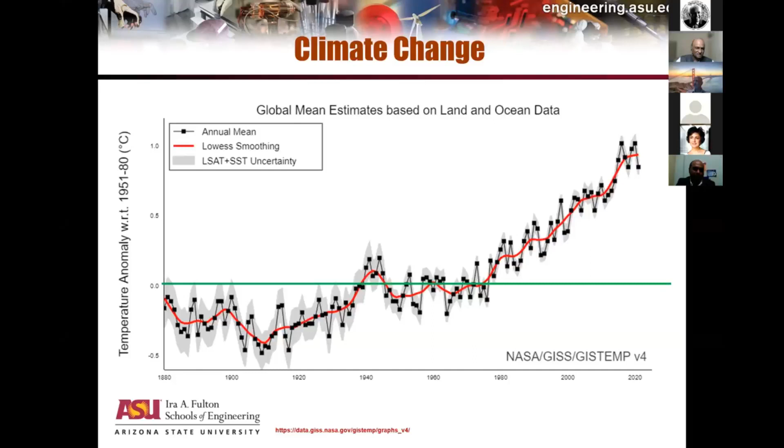So with climate change, the building industry and every single person on earth has this issue to deal with, in terms of leading a sustainable life in every single aspect of that life, not only at the workplace but also the way we live. I'm not going to give you the formal definition that came out of the Brundtland Commission, but I'll give you my own definition of what sustainability is.

To me, sustainability is like trying to define a very complicated topic like pornography - it is very difficult to define, but I don't have to tell anyone when things are sustainable. It's just that people may elect to ignore it. But the signs of what is sustainable living and what is not are very easy to discern. I hope the audience today will reflect on what they do every single day, from the time they get up to the time they go to sleep, and see whether every single minute of the day is connected to sustainable living, and whether they are leading a sustainable life or not.

So the last part of my presentation today is to talk about a few approaches. These are my viewpoints - they are not the viewpoints of Arizona State University or anyone else.

These are the things that I have learned by working in this area over the years. I'll discuss five components in terms of the approaches I will cover with you today.

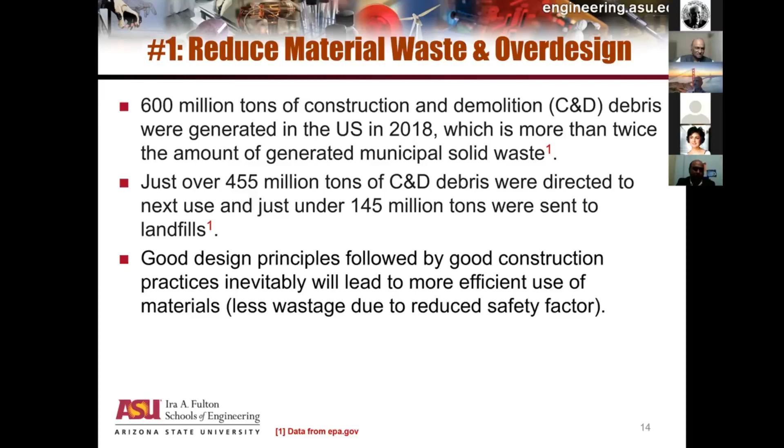My introduction to really getting my hands dirty started in the 1990s with a local problem that a local company brought to my attention. There was a company here called Del Webb Construction, primarily in residential and a little office building industry, and they had branched out from Arizona to a lot of other cities, including Chicago.

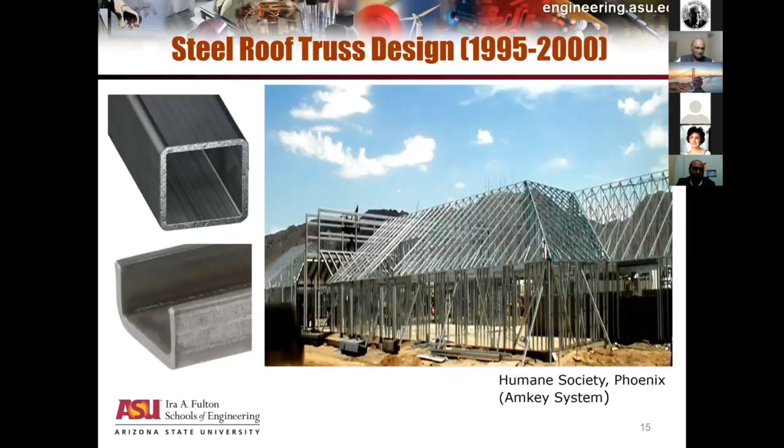Hari told me, please try to make sure you don't come up with too technical issues. But I couldn't resist putting this slide up just to give you a perspective that science and engineering cannot be ignored. So what I learned back in Iowa kicked in.

I said, let's try to formulate this problem as an optimization problem. An optimization problem is what each one of us does every single day subconsciously. If you could make that a conscious way of looking at engineering problems or resource allocation problems, you'd find very interesting solutions.

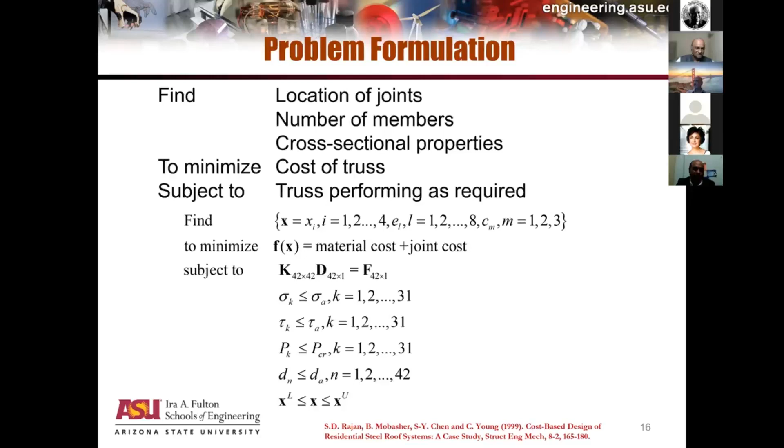I wrote a computer program going back to MS-DOS and then to Windows back in the mid-1990s. There was no machine learning involved, no artificial intelligence involved — it was heuristic-based mathematics driving the design.

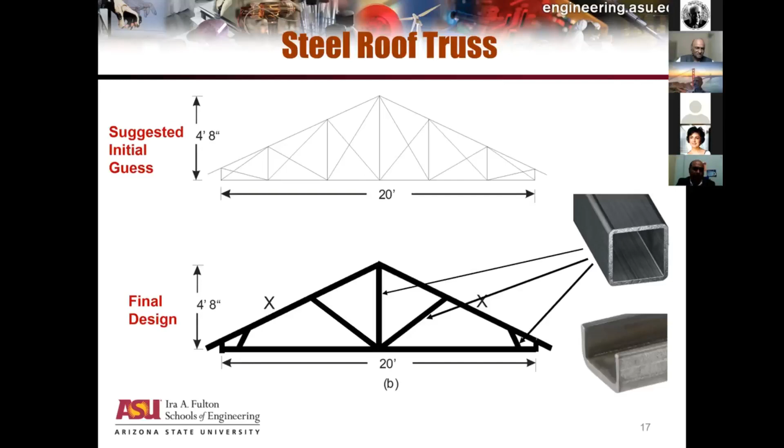When I showed this design to the local company, they said this doesn't look like something that would work, because this is something we have never seen, never used, never built. I said, if you're skeptical, go ahead and build one, and we'll test this in the laboratory for you. So they built one and brought it to the lab. They built 3 of these trusses.

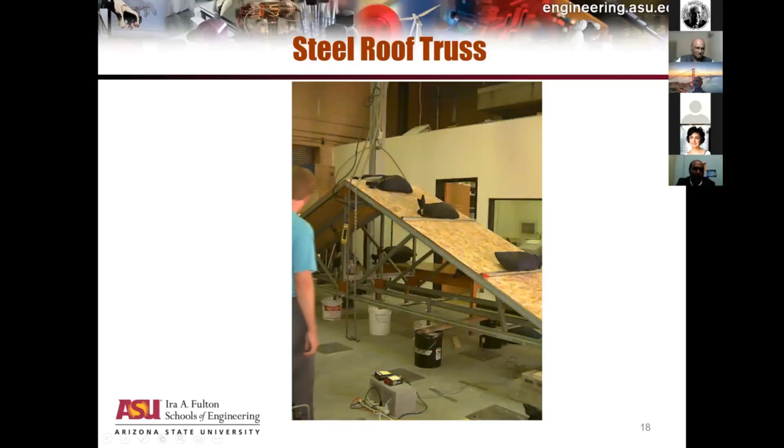In the US, most roof trusses are typically 2 feet apart. So you can see a 4-foot span, and the top chord plywood is put on. On the top chord, we loaded this with sandbags. We instrumented this based upon what we had available in the 1990s. We loaded it completely, and then we ran out of sandbags.

Just to recap: span of 20 feet, 3 trusses, spacing 2 feet on centers. Top chord design load was 30 pounds per square foot, bottom chord was 10 pounds per square foot, and the design load was 1,840. We took it to 2,000 pounds when we ran out of sandbags, and the thing didn't budge an inch. The deflections were extremely small, and there was absolutely no sign of distress anywhere in the structure.

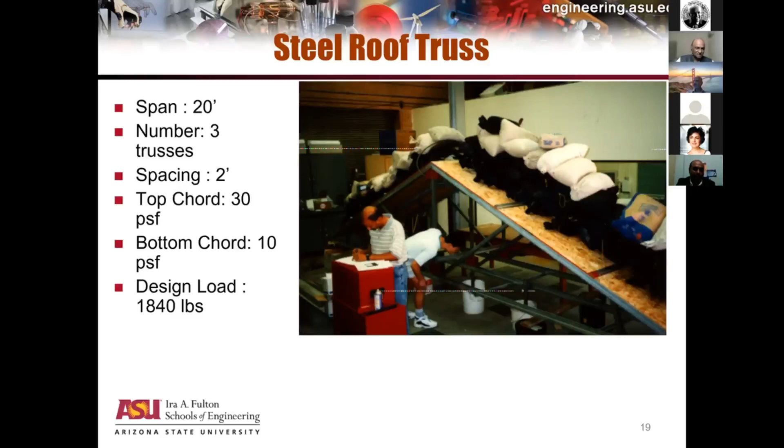So we gave them the design program and the equations to use for the design. I'm happy to say they took it, and a large number of structural systems today have been designed using the concept of cold form steel arising from automotive waste. I know automotive waste in India will be a big deal when government norms kick in and old vehicles on the streets need to be taken out of circulation.

My second small solution to this enormous problem is to improve constructability and quality of construction. For the architects and civil engineers listening in, we need to work as a team to design reconfigurable buildings. For example, in the US, malls are dying. So what do you do with malls that are relatively young? We can't just mothball them, we have to reuse them. If that thought process of reconfigurable buildings were built into the initial design, we would have much less of a problem.

A second big problem, which probably may hit us in the next few years, is work from home. When work from home really takes off — it has taken off a little bit in the US — what will happen to office buildings? Are they going to be mothballed? Is it easy to use an existing office building for something else? What will happen to homes currently being designed where you need a certain part of the house to be used as office space? That's an issue that needs to be addressed.

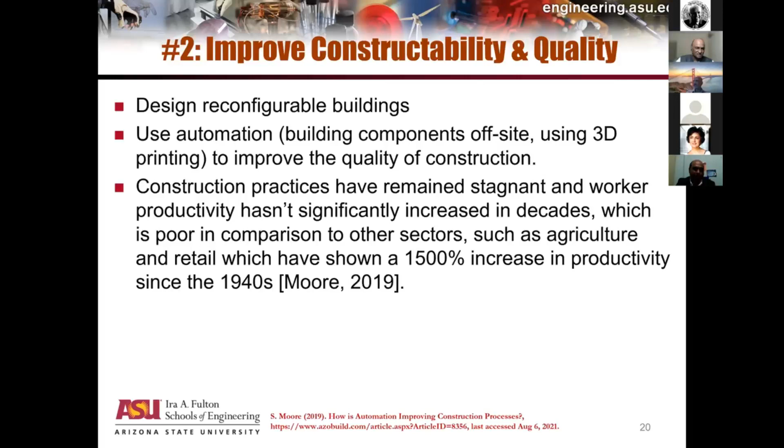At Arizona State University, we've done a little research work on how to improve things, and I'll give two examples. The first is treating the envelope of buildings. Most of the energy loss or unwanted gain from outside comes in through the skin of the building. Commercial and residential buildings in the US typically use 40% of the energy use on this. If you improve that efficiency by merely 5 to 10%, based upon existing technology available, it'll easily translate to enormous savings in energy.

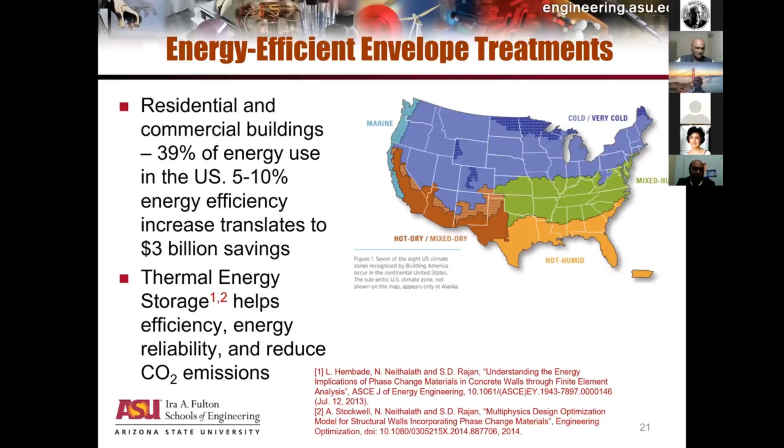So we researched an area called phase change materials, or thermal energy storage. I've given here two papers we published back in 2013 and 14. I'm very happy to report that two of our students recently appeared in Forbes Top 30. They received money from SBIR, the Small Business Initiative in the US, and started a company called Enkoat. Enkoat has used our technology in coming up with a proprietary blend of thermal regulating additives that you can add to paint, and paint the outside of existing and new buildings in order to cut down on energy usage.

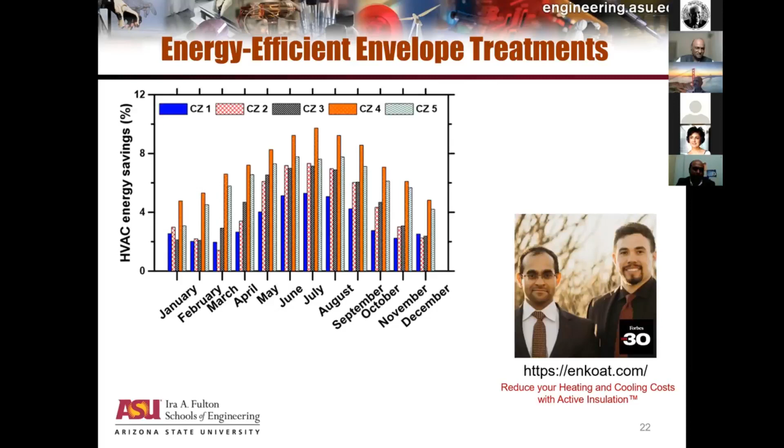With that, we said, why don't we take that idea of using thermal energy storage and apply it in the context of 3D printing? One of the advantages of 3D printing is that you can have extremely high quality control.

You can build components on site, so transportation costs can be decreased tremendously. You can come up with components that can then be used as building blocks in making whatever you want to make. We have a 3D printing lab on campus where these components were printed. You can see here, foam has been printed on top of a concrete wall. We have taken waste material like fly ash and put that into the 3D concrete mixture, and we have extruded them into a variety of shapes. This is, again, one of those ideas borrowed from other industries and used in the building industry. 3D printing technology was not developed in the building industry, but there's nothing which says we cannot take ideas that other industries have pioneered and use them to advance our own industry.

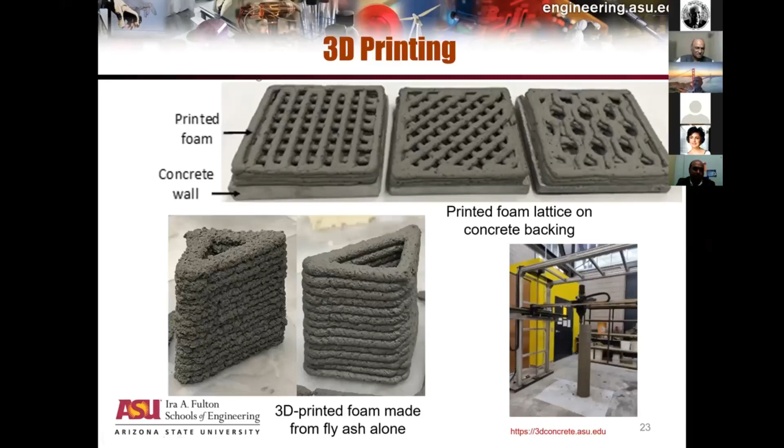These things will work if you have good modern tools where you can do computer modeling, where you can base things on science rather than gut feeling or repeated testing. So virtual testing is what we do. We design things in the computer, and as a proof of concept, we use the designed computer models, and we make actual components and test them. On the screen, you see on top the computer model of a component where attention has been paid to reducing the amount of material, a sustainability concept, while making sure you don't compromise on safety, you have very high quality control, and you extend the longevity of whatever components you're making.

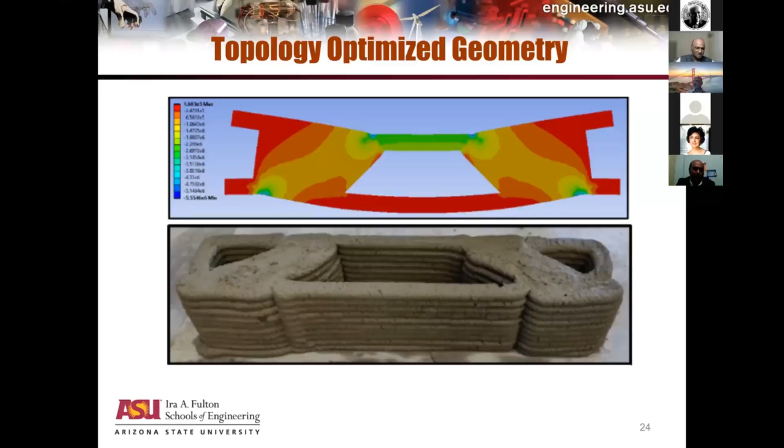This idea has now been taken to a home being built in Tempe. It's a 1,700 square foot home with 3 bedrooms and 2 bathrooms. 70% of the home is 3D printed. If you're interested in the details of this building, I've given a link below, and you can look at the company and the entities involved in using 3D printing technology to automate building homes. Hopefully, once you scale this, the cost will come down, and this eventually can provide a solution for affordable housing.

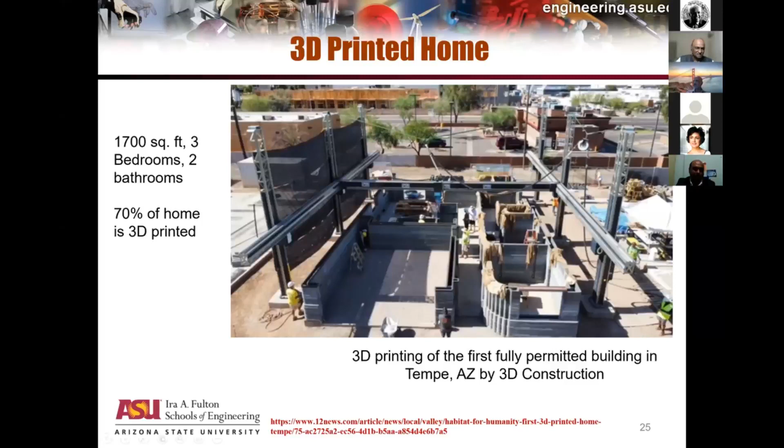The third component is the use of sustainable materials. Whatever I'm saying here is nothing new, but there are some stark realities we need to deal with. We cannot switch things off today and pass legislation banning the use of concrete and steel. That's not possible, and the consequences would be extremely dire, but we can definitely raise awareness that concrete and steel need to be made more sustainable and more energy efficient. There are 3 terms very popularly used today to classify the sustainability of materials: one is embodied energy, the second is embodied carbon, and both by themselves are not enough. There is a new term recently used called global warming potential. All 3 terms look holistically at what is possible in classifying a material or technology as sustainable.

The bad news is we have ignored this problem for a very long time, and things have reached a crisis point. If you look at the paper by Alter, published in 2019, a 4-storied multifamily building made of low carbon material is the sweet spot, the optimal design for a zero emissions or near zero emissions building to take care of housing needs.

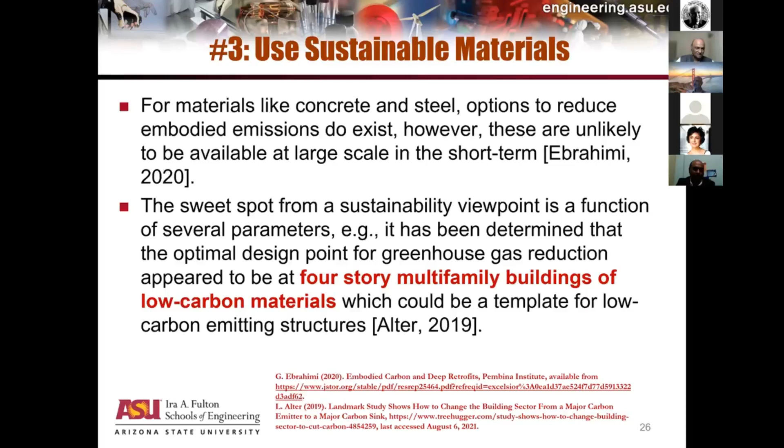What does that mean? It means that the moment you make a building for use by human beings, automatically on day one, 100% of the emitted carbon has already been sent out into the atmosphere. So we start with something negative, and then we have to find a way of overcoming that. That's not going to be easy. We have to start thinking in terms of using sustainable materials that have as minimal impact on the environment as possible, from the day the design is envisioned through the construction process.

Hari told me to be aware that a good portion of the audience deal in the 100 crore plus building industry, and they're looking to make money while being sustainable. Perfectly fine. I was thinking I'm the least qualified person to talk about the business end of things, because I have very limited experience running businesses. But as a consumer, I know you have to know exactly what the value of a certain thing is, not just what the cost is. So I'm giving you a personal example.

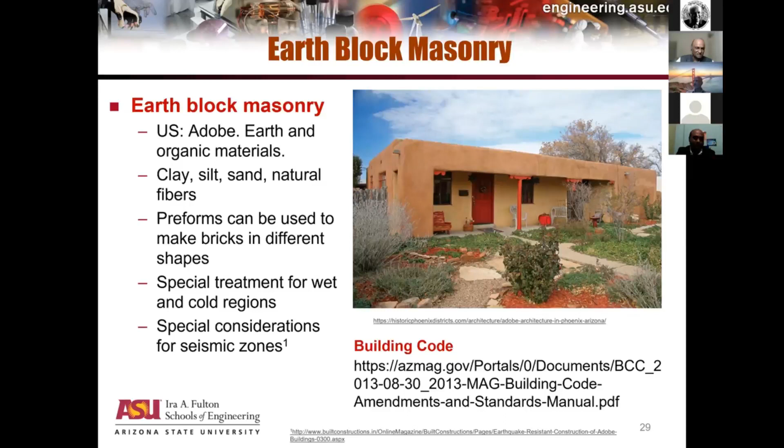And I'm not the first one to say this. We are obviously honoring Prem Jain. I took this quote from a 2017 newspaper article in the Economic Times of India. He says that green building concepts are nothing new, that Indians knew this long time back, but somehow we seem to have forgotten what our ancestors told us, and we have picked up all the bad things from the rest of the world, and we have really corrupted the way we live.

Which brings me to what Gunjanji said at the beginning. I have to respectfully disagree with what he said. I think we need to make things that are outside our immediate domain a part of our initiative.

So I've been a big proponent of reversing the rural to urban migration that has been taking place all over the world. The world's biggest city is Tokyo, and Delhi is not that far behind. If we continue to allow people to migrate from rural areas to the cities, the entire planet will become unlivable.

And this is my quote: happiness is not hidden in cities waiting to be discovered. The cities are terrible places to live in.

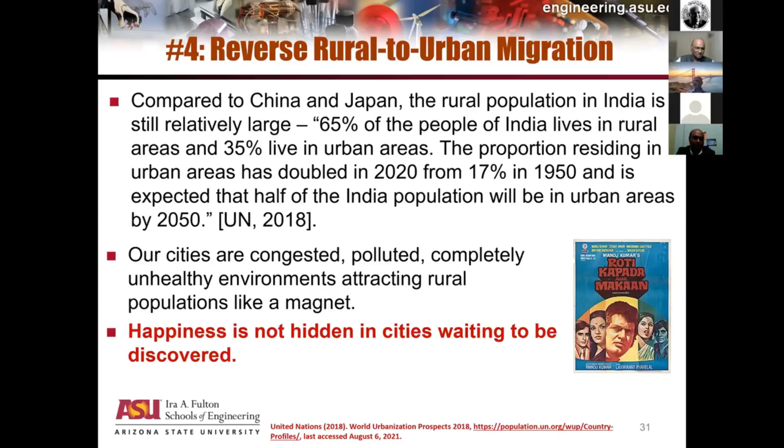And unfortunately, the pandemic has clearly shown that we as human beings have failed to live up to that expectation. I'm nearing the end of my presentation, and the last slide is about this very dangerous thing that is happening today.

The internet has given every single person with access to it a bully pulpit. This bully pulpit can be used for good purposes, but increasingly it is being used for bad purposes.

If you look at the two biggest lies we have seen from very seemingly organized and huge industries, they are the tobacco industry and the plastics industry. The tobacco industry told us over and over again that smoking tobacco really is not unhealthy—absolutely wrong. And then the plastic industry said, don't worry, plastic is recyclable, and unfortunately, it is not. Only 10% of the plastics in the entire world, best case estimate, is recycled. 90% of plastics finally ends up in the ocean or in the landfill.

And the building industry has to be very careful not to talk in terms of LEED certification and green building labels, as if giving some other component of the building industry a certification automatically solves the problem. It's definitely not true—we know there are big holes in LEED certification. LEED certification started off with very good intentions, and we need to take those intentions and look at modern perspectives, modern science, and modern engineering in order to do things the correct way.